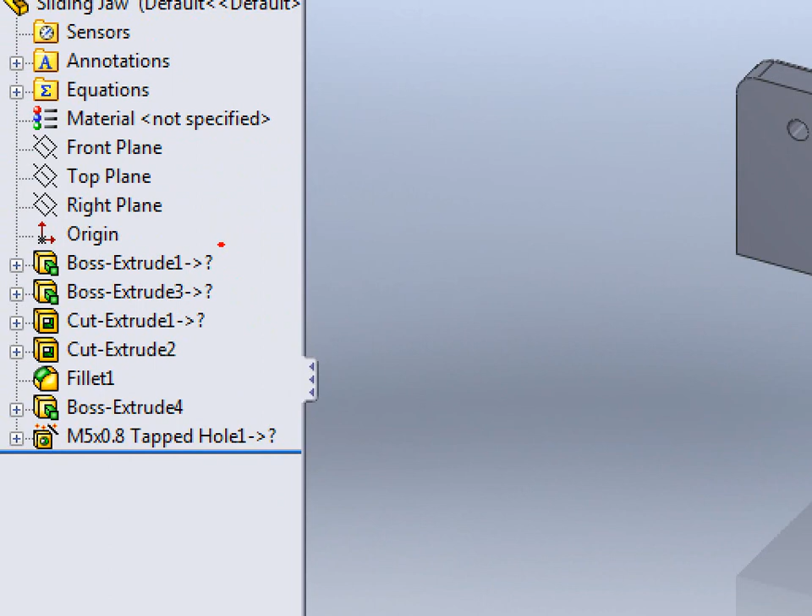Okay, so if you close everything else down again, and if you open up this time just the sliding jaw, again you see we get, over in our window here, the little derived component symbol, the little question mark showing us that it's out of context. So we've opened this up out of context.

But let's say we wanted to create a copy of this part. We don't want to change the original, we just want to create a copy. If I just do a File, Save As and create that copy, what it'll actually do is, SOLIDWORKS gets it to replace that with your new version in the assembly.

Now we don't want to do that, we don't want to modify the assembly, we're happy enough with the sliding jaw we have there. But let's say we want to create a copy of that for use in maybe other assemblies or elsewhere. So what you've got to do is use this little Save as copy box. If you just check that box, and maybe rename this, I'll just put my initials in ahead of it.

So DS sliding jaw. So we're going to create a copy of that, but we don't want to replace the original one in the assembly. Okay, so just be careful of that and be aware of that. If you do a standard Save As, it'll replace that part in the assembly with your new part. And what we really want to do this time is just create a copy of it. So Save as copy. So I click Save on that.

And if I close that down, and now if I open up, I should have a DS sliding jaw. There it is. And there's my DS sliding jaw. Now it's still, as you can see, out of context. It's still got all those little question marks. So what we've got to do is modify this part to make it a standalone part.

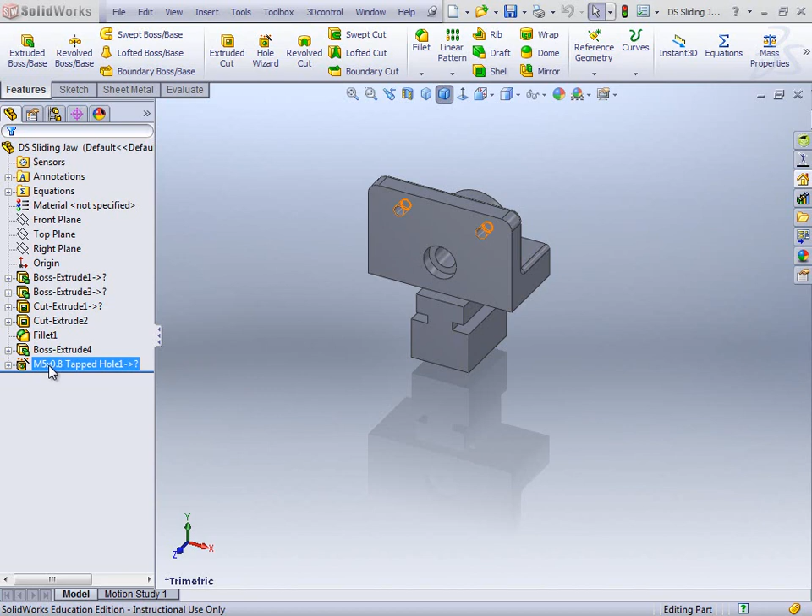So the best way to approach this is from the bottom up. If I start off with the tapped holes, we'll repair from that way up. So if I click on that face and go Normal To, really it's a case of redoing everything. That tapped hole has been created with a hole series. So what I've got to do this time is select the Hole Wizard option, select the tapped hole, let's say ISO bottoming tapped hole M5, and we go through all this with it.

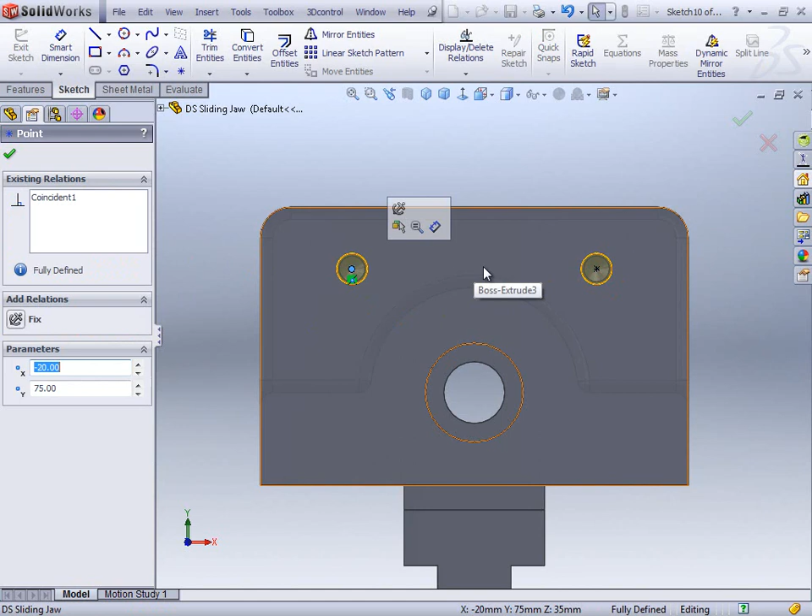And then the positions are going to be there and there. And it's a matter of lining those up. Now, if you look, I got those two holes in, and they've made relations, so they've snapped on, latched on to the original holes there. I don't want that, so I'm going to display/delete relations, and if I delete all, you can see they've gone blue again, and I can then pop in my own relations.

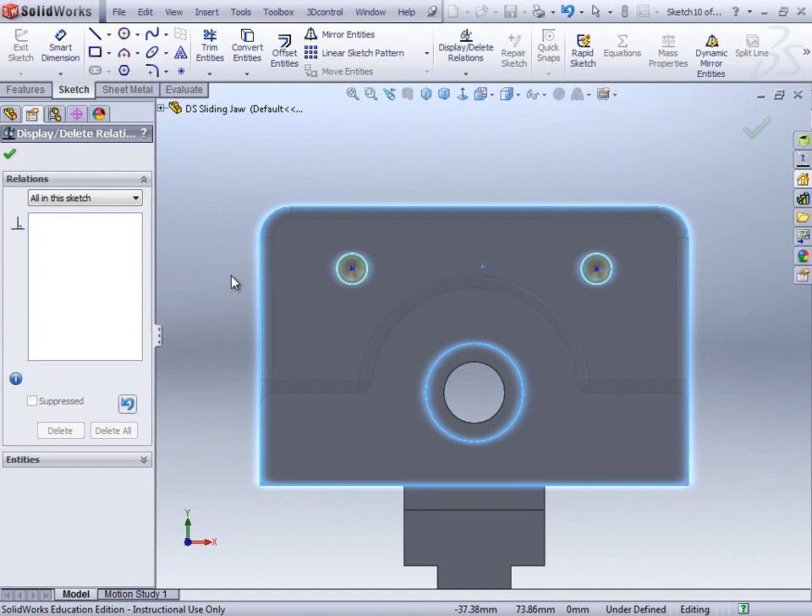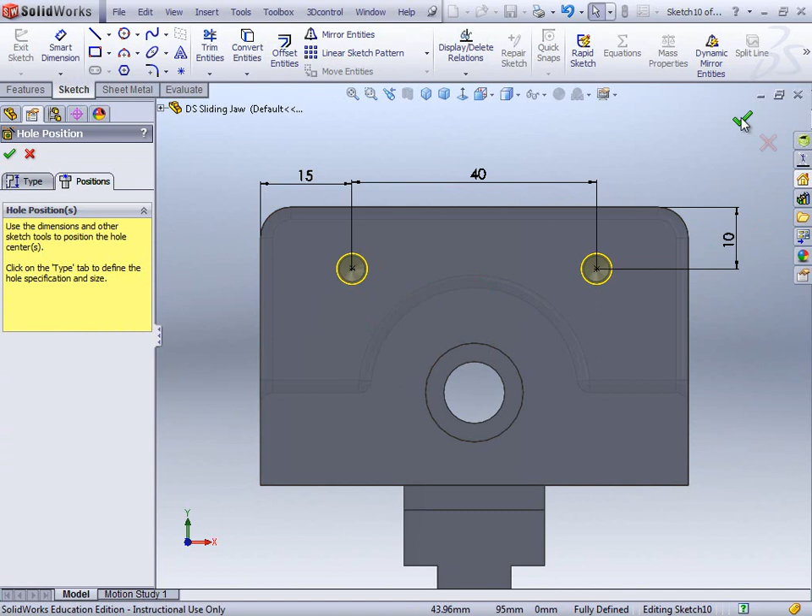So I just use those centers to line it up to get the right positions, and then I can pop in a few dimensions. So let's see. Whatever dimensions it requires to fully define it again. And then one last one, probably make those horizontal. That should get me fully defined. There it is, fully defined now. And click OK.

Now we've got two holes. We've got the tapped hole and we've got this M5 tapped hole. So if I select that original tapped hole and just hit delete on the keyboard, that gives me my part in there. And that's all we're going to do, and I'll carry on with this in the next section. We're just going to go through this and fix these parts up.

So you can see as I work my way up, the boss extrude is okay, the fillet's okay, extrude cut 2 okay. So in the next video we'll have a little look at fixing up this cut extrude 1. Okay.